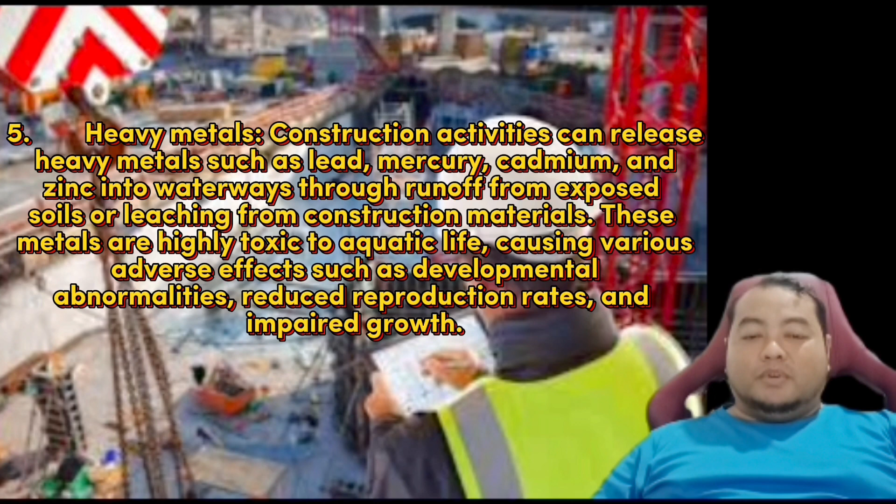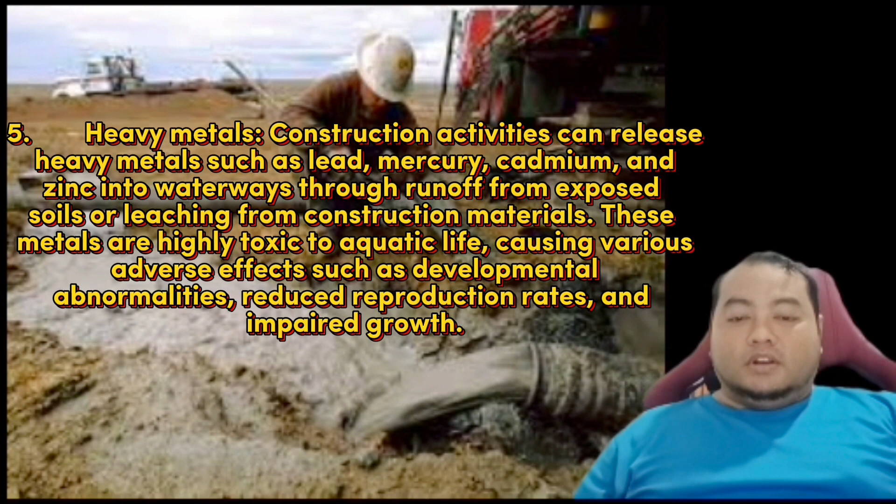And fifth, heavy metals. Construction activities can release heavy metals such as lead, mercury, cadmium, and zinc into the waterway through runoff from exposed soil or leaching from construction materials. These metals are highly toxic to aquatic life, causing various adverse effects such as developmental abnormalities, reduced reproduction rates, and impaired growth. The risks posed by this pollution to aquatic ecosystems, water quality, and downstream communities are significant.

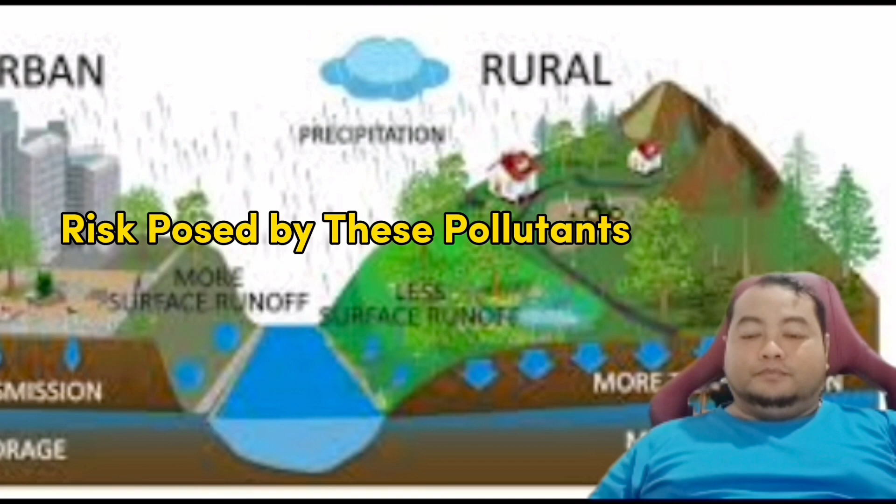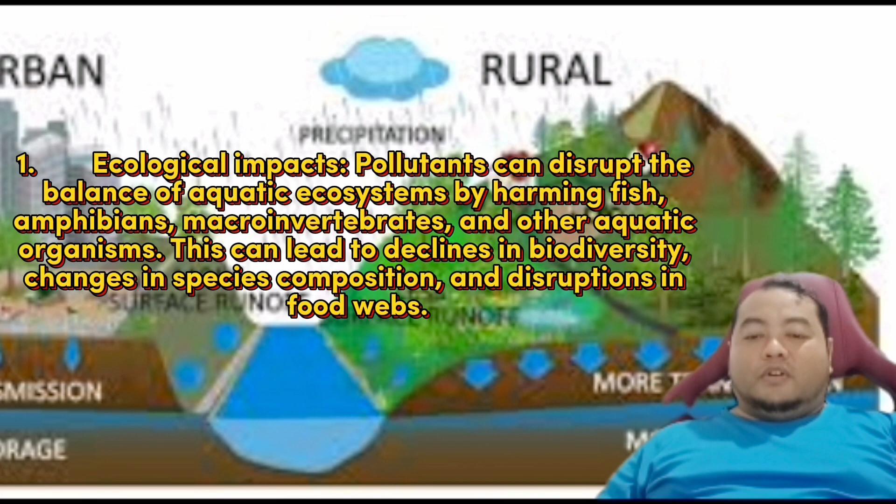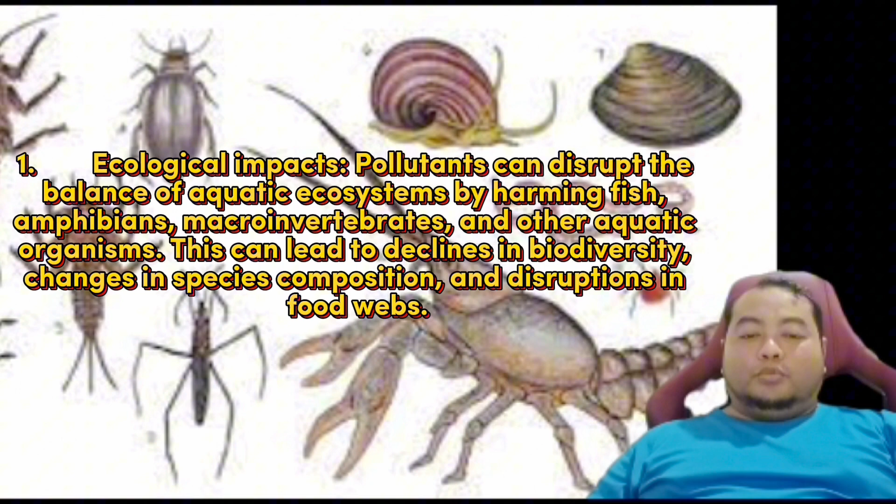First, ecological impacts. Pollutants can disrupt the balance of the aquatic ecosystem by harming fish, amphibians, macroinvertebrates, and other aquatic organisms. This can lead to a decline in biodiversity, change in species composition, and disruption in food webs.

Second, water quality degradation. Pollution can degrade water quality by increasing turbidity, nutrient levels, and concentrations of harmful substances. This can impair water availability for drinking, recreation, and agriculture, leading to economic and public health risks.

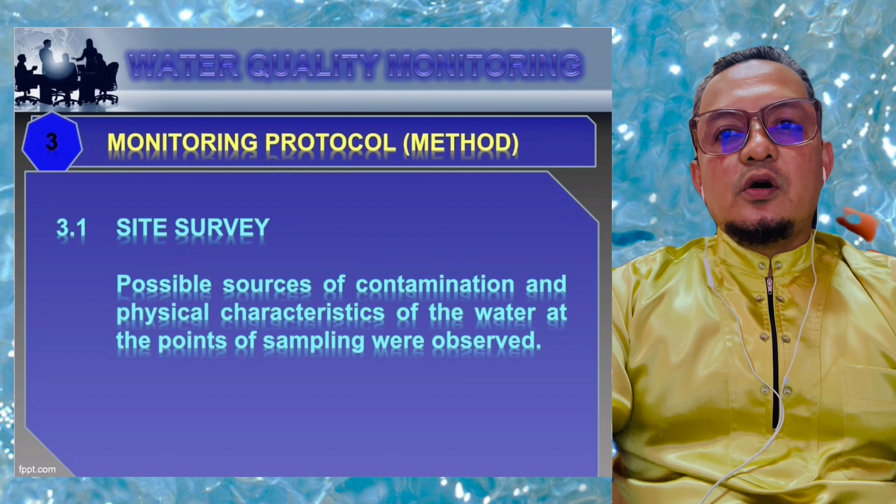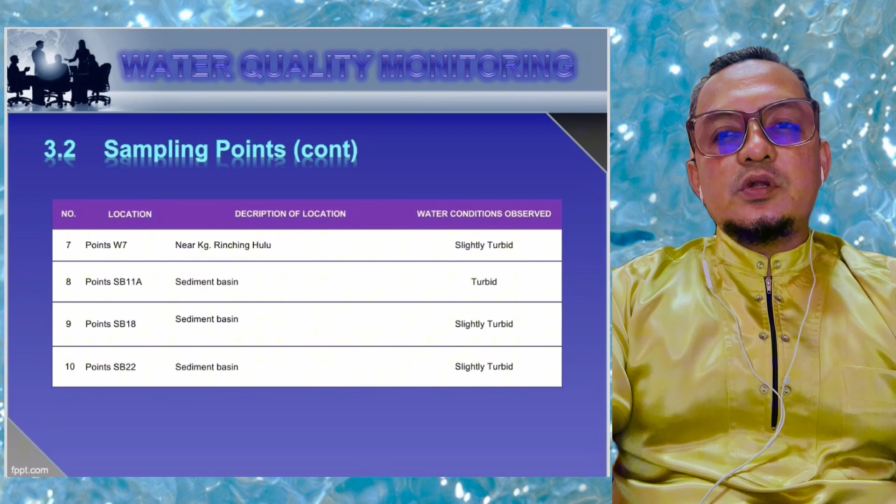Now I will present the monitoring protocol or method. 1. Site survey. Possible sources of contamination and physical characteristics of the water at the point of sampling were observed. 2. Sampling points. 10 sampling points were selected for water quality monitoring as follows. Number 1, location point W1 near Kampung Sesapan Kelubi. The water condition was observed to be slightly turbid.

Point W3 near a cattle and vegetable farm, slightly turbid. Point W4 within an oil palm and rubber estate, slightly turbid. Point W5 near Kampung Kembu Hilir, slightly turbid. Point W6 near a cattle and goat farm, slightly turbid. Point W7 near Kampung Rinching Hulu, the water condition was observed to be slightly turbid.

Point SB11A sediment basin, turbid. Point SB18 sediment basin, slightly turbid. Point SB22 sediment basin, slightly turbid.

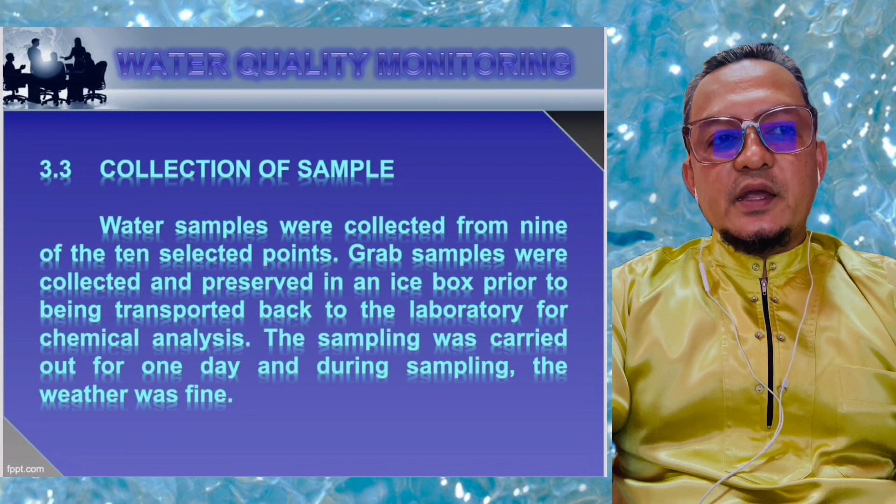3. Collection of samples. Water samples were collected from 9 of the 10 selected points. Grab samples were collected and preserved in an ice box prior to being transported back to the laboratory for chemical analysis. The sampling was carried out for 1 day, and during sampling, the weather was fine. For analysis, on-site testing of pH, temperature, and dissolved oxygen was conducted.

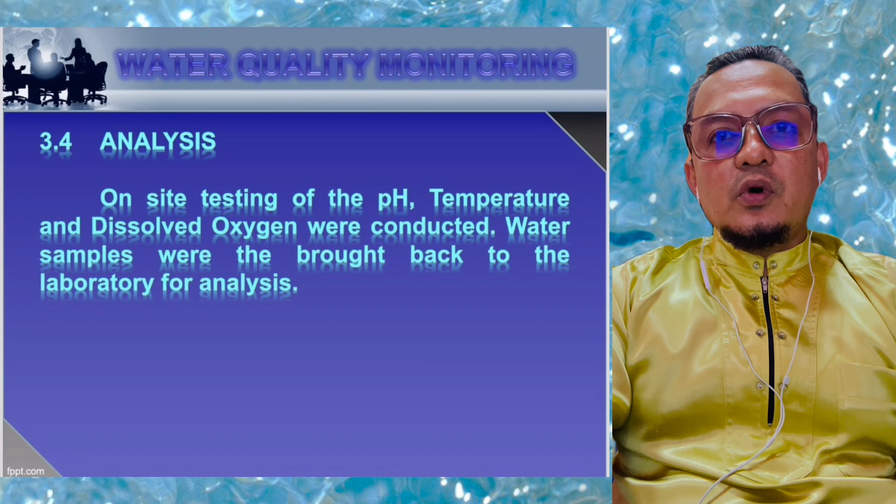Water samples were brought back to the laboratory for analysis. The parameters of analysis: 1. pH value, 2. temperature, 3. dissolved oxygen, 4. chemical oxygen demand (COD), 5. biochemical oxygen demand (BOD5), 6. total suspended solid, 7. oil and grease, 8. ammoniacal nitrogen (NH3), and 9. E. coli count, 10. turbidity.

Method reference: APHA standard method for examination of water and wastewater, 21st edition, 2005, American Water Works Association and Water Environment Federation, WEF.

Hi, my name is Raizat Zulkapri, and today I will present the result of water quality monitoring that was conducted at the river outlet discharge from the site.

First of all, I will share the data analysis result of water quality monitoring for the proposed project mixed housing and commercial development on lot 39 Mukim Beranang, district of Hulu Langat, Selangor Darul Ehsan.

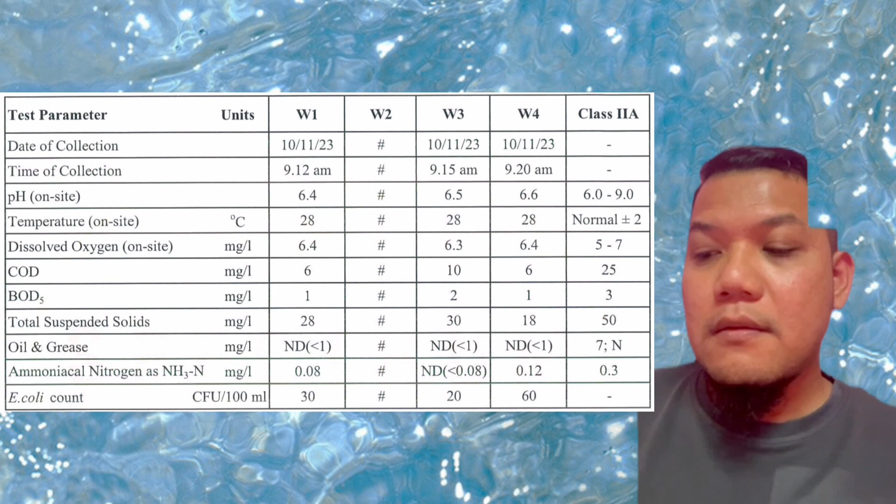From W1 to W4, based on table 1, the results show that 7 parameters tested were in range class 2A. For example, from the table, at W1 dissolved oxygen is 6.4 mg per liter, COD is 6 mg per liter, BOD is 1 mg per liter, pH is 6.4, total suspended solid is 28 mg per liter, and ammoniacal nitrogen is 0.08 mg per liter.

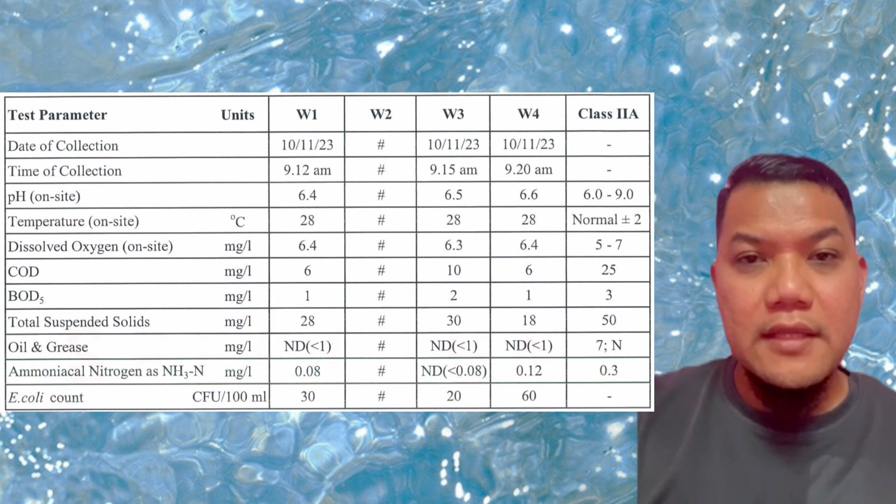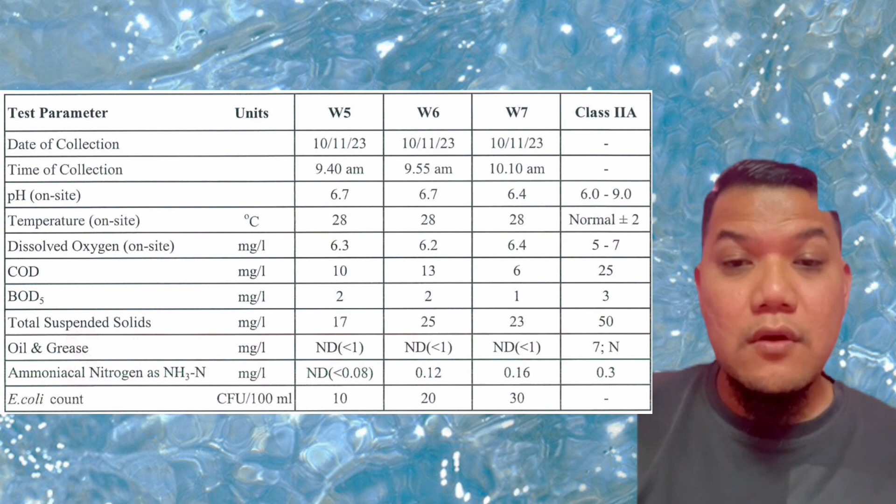Next, we also look at table 2, where we can see the W5 to W7 points are also in class 2A based on the National Water Quality Standard for measurement.

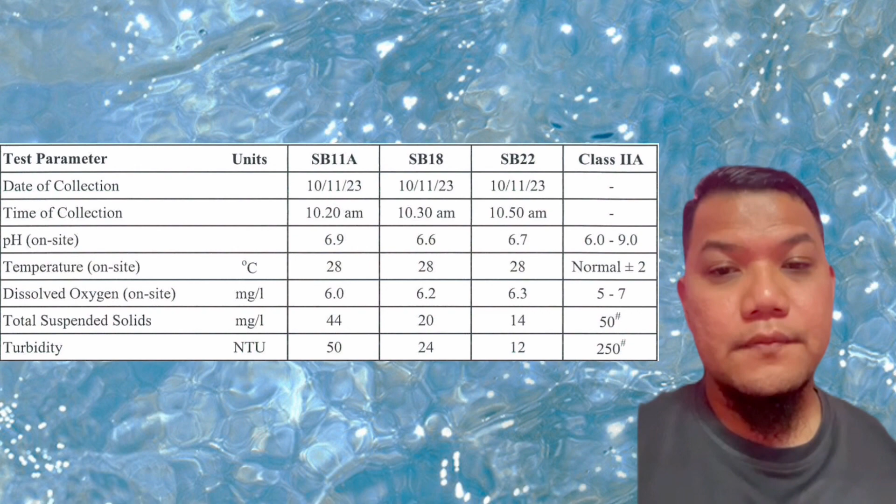From the table data analysis results, we can conclude that the water discharged at the river from the site was in class 2A and there is a need for conventional treatment required.

First is erosion and sediment control. Erosion and sediment control are critical aspects of land management, particularly in construction, agriculture, and land development projects. They involve strategies and measures implemented to prevent soil erosion and the movement of sediment, which can lead to environmental degradation, water pollution, and loss of fertile soil. Methods related to erosion and sediment control such as silt fence, erosion control blanket, and sediment basin help prevent soil erosion and sediment runoff into nearby water bodies.

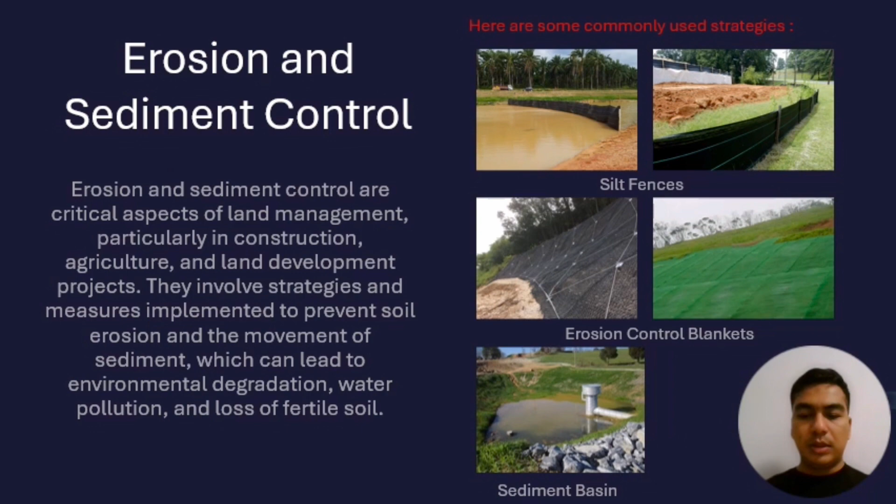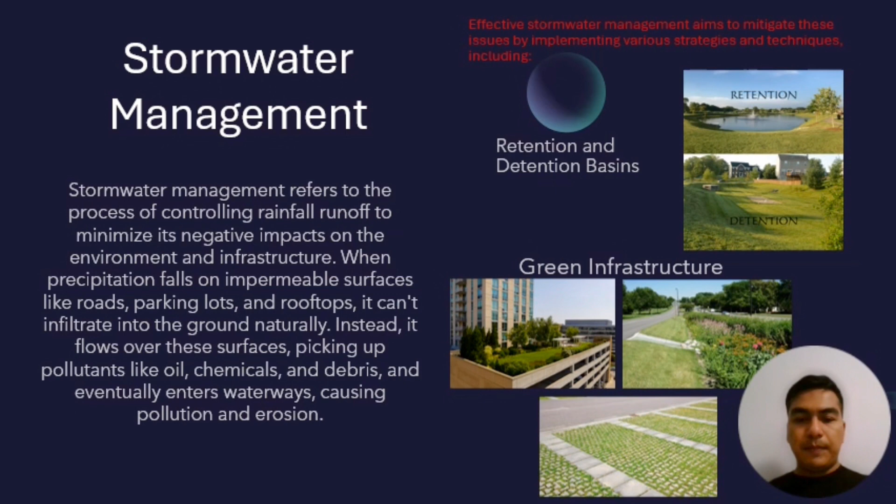Next is green infrastructure. This includes practices such as permeable pavement, green roof, rain garden, and vegetated swale. These features help absorb and treat stormwater, reducing runoff and filtering pollutants before they reach water bodies.

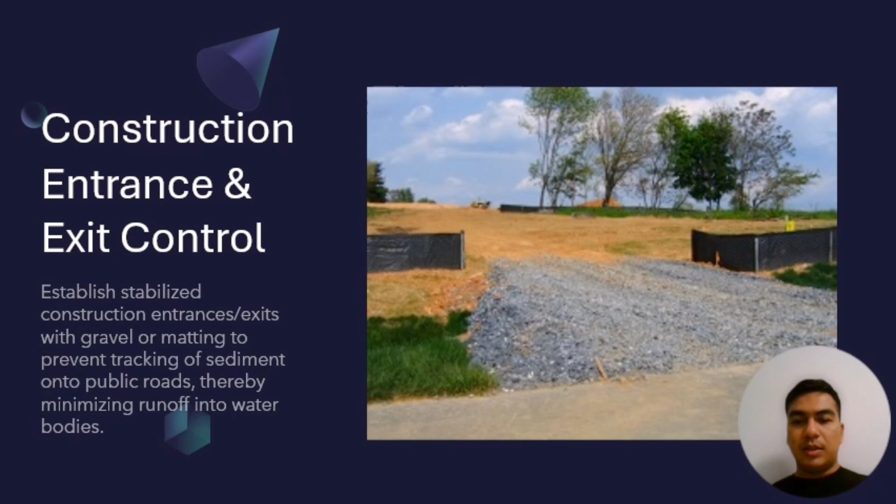By implementing these mitigation measures and best practices, construction sites can minimize their impact on water quality and help protect aquatic ecosystems. That's all from me. Thank you.